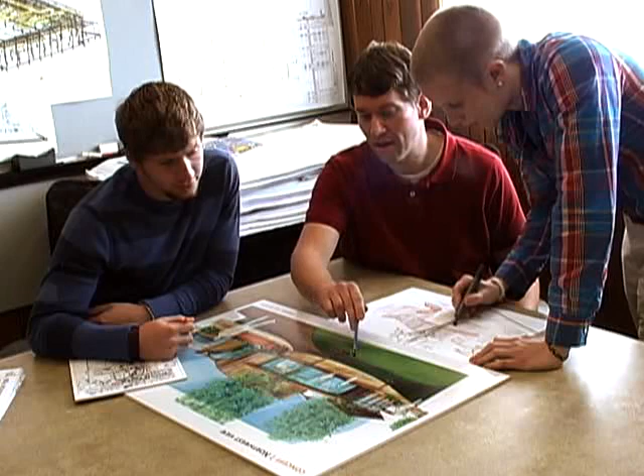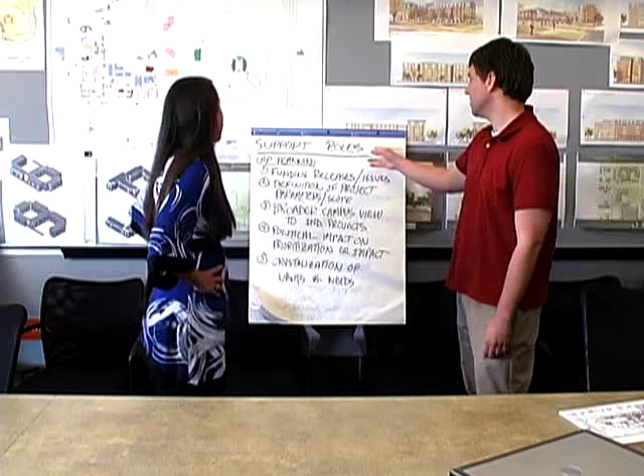Architects typically work in teams and may be responsible for different aspects of the building design. When beginning a new design project, an architect will initially meet with the client in order to understand the specific needs of the project. The purpose of the building, together with the budget, building materials, and the location, all affect the design and must be taken into careful consideration.

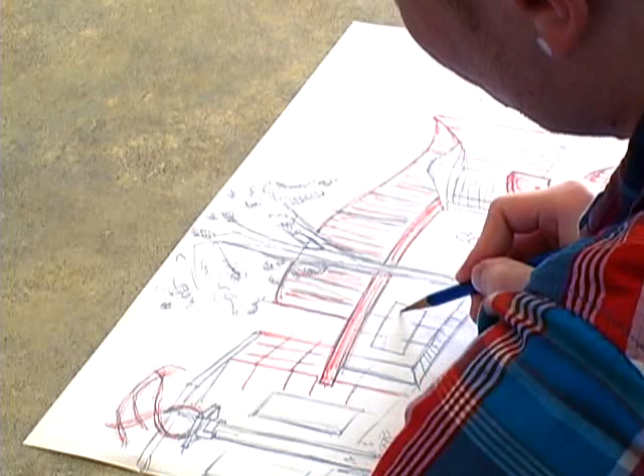After researching the project, an architect begins by drawing sketches of the building in its environment. These initial designs enable the architect to share creative ideas with the client. It is important that everyone involved agrees with the proposed design before more time and resources are invested.

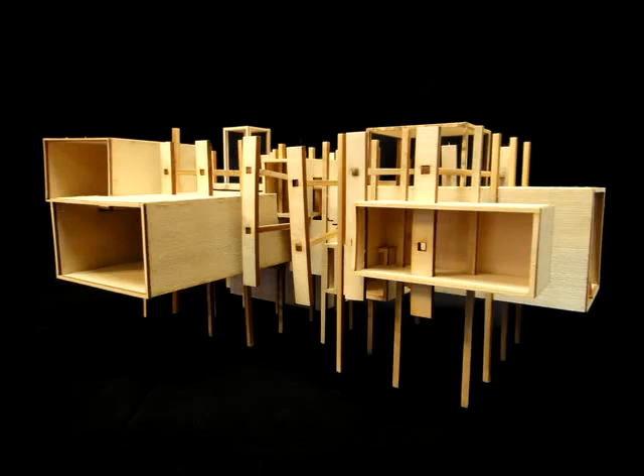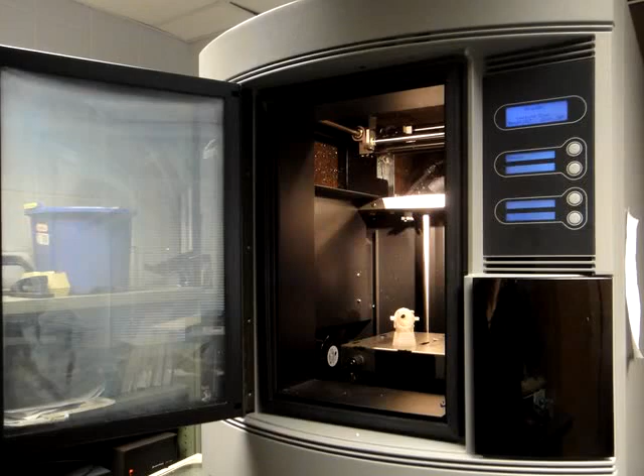Once the initial drawings are approved, a scale model is produced. This is usually made of such materials as wood, metal, plastics, or thick paper called museum board. Recently, architects have begun using 3D rapid prototyping and laser cutting to create custom components for their architectural scale models.

The model enables the relative proportions of the building in its environment to be easily seen, and is therefore used to promote the project to the client and public.

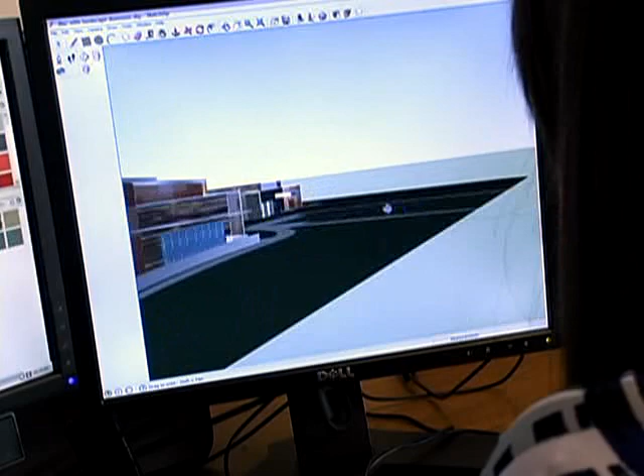The next stage of the architectural design process involves constructing a 3D model of the building on the computer by using specialized software. Such important considerations as the relationship of the building to the direction of the sun can readily be shown.

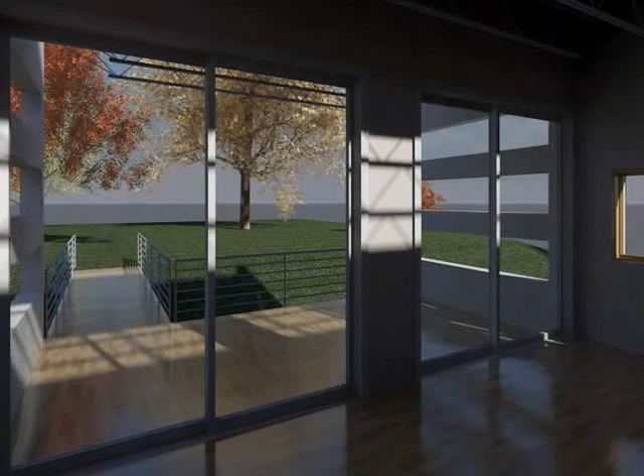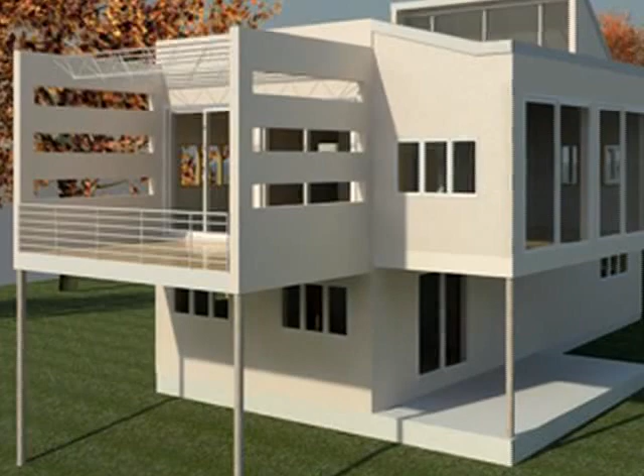Often, an animation is produced whereby a virtual camera flies around and through the building. The animation conveys a sense of the three-dimensional space the building occupies. These models can also be interactive and allow virtual human representations called avatars to walk through the building.

Although architects do not construct the actual building, they are often involved with the process of selecting and working with the contractors to ensure that the design is accurately realized.

Construction documents are developed to specify everything from particular building materials to precise measurements of all features of the structure. The contractors must follow these documents as they construct the building.

One of the most important decisions an architect makes is the choice of building materials and the construction method. Throughout history, we have seen a large variety of techniques and materials used to create amazing buildings.

In ancient Egypt, cut stone was used to create load-bearing constructions that were able to withstand the test of time. The Egyptians, and later the Greeks, also used cut stone to build structures using the post and lintel construction method.

The Romans were experts in constructing stone arches that were used to create colossal arenas and a sophisticated system of aqueducts. During the Gothic period, from the 12th to the 16th century, architects created sacred buildings that incorporated sophisticated architectural structures.

Such structures as vaulted ceilings, pointed arches, and flying buttresses. These buildings contained impressive stained glass windows that illustrated stories from the Bible.

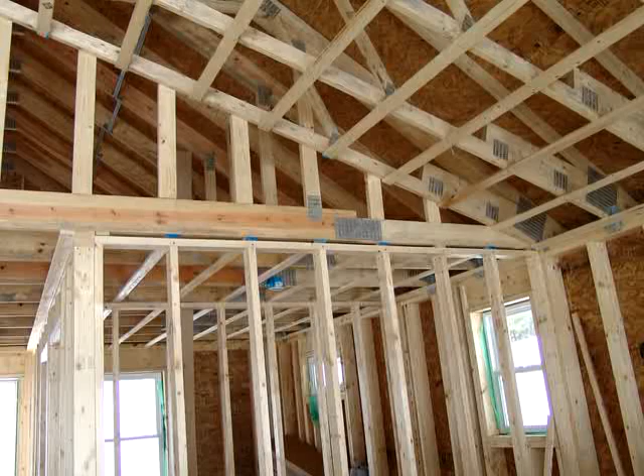Today, architects have a wide array of materials to choose from. Iron, steel, and reinforced concrete enable architects to design buildings that are taller and less costly than those constructed using stone. These durable materials can be manipulated to create organic forms that reflect their environments.

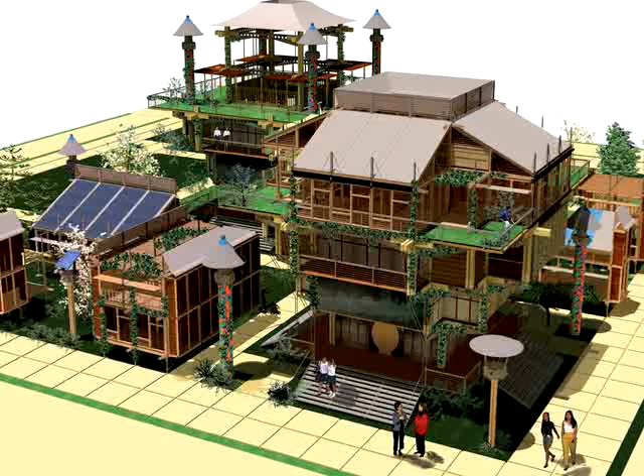Whichever materials are used, architects aim to design structures that become a significant part of our lives. In our time, many architects are concerned with designing buildings that conserve energy and use natural resources in thoughtful ways. These new structures will help to define our future in the same way that ancient architecture influenced both civic and spiritual life throughout the world.